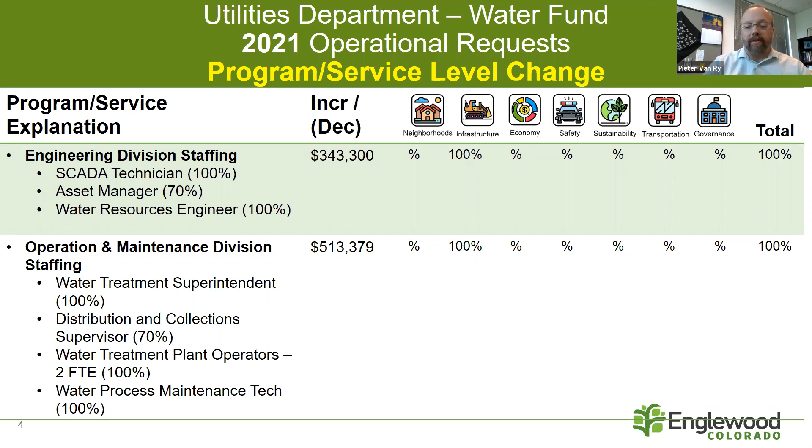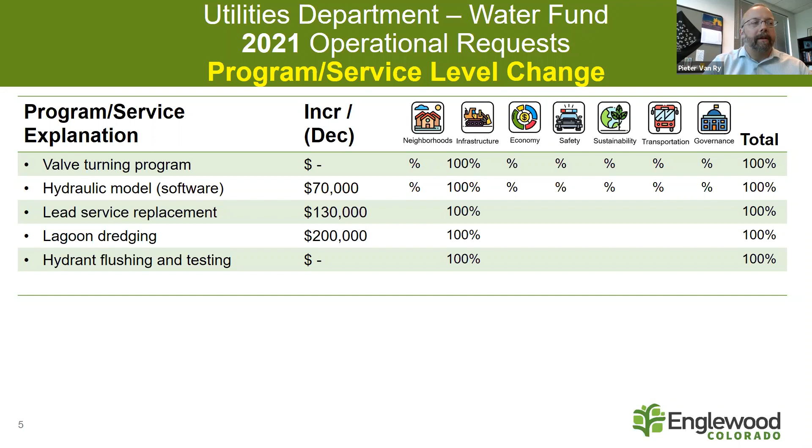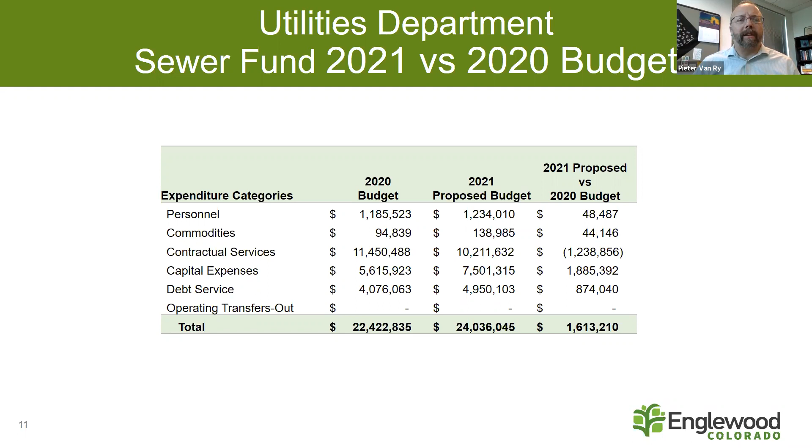Our significant areas are capital expenses, which are predominantly related to South Platte Renew. We also have some debt service. Because of the schedule of projects at South Platte Renew to meet the Regulation 85 treatment requirements from the state, we are planning to issue debt in 2021 to cover that project, as well as some other projects that are in the capital program for South Platte Renew.

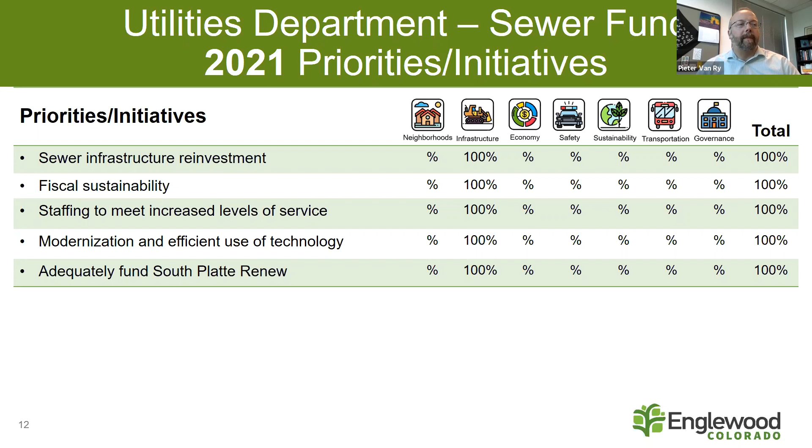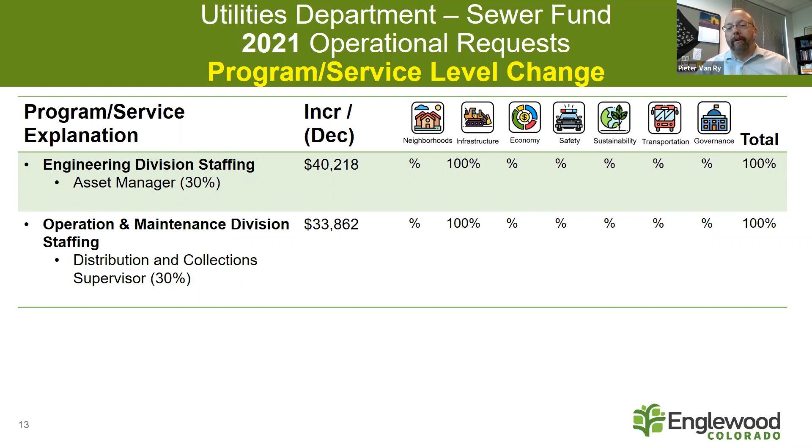The staffing additions for the sewer fund are actually percentages of the staff that I've already covered. So if you recall from the water fund, there were 2 positions that were 70%. These are the two positions that are the other 30%, because they're associated with the sewer fund.

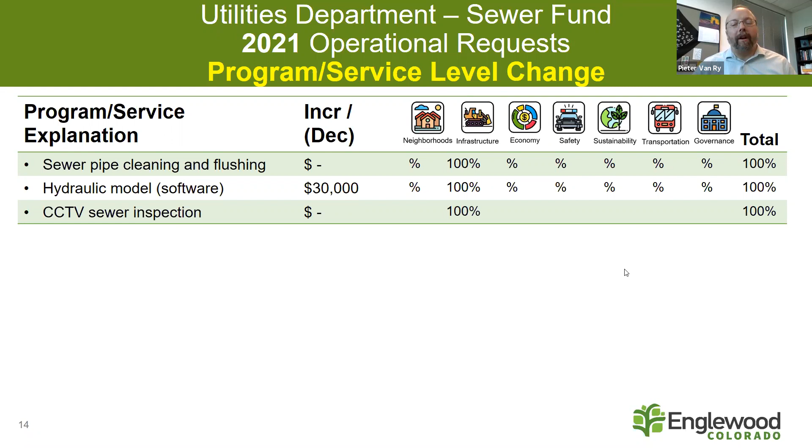So these are the programs that we want to focus on. Cleaning and flushing of our sewer mains is an important project to ensure that we don't have backups. Again, that hydraulic model software helps us understand the system. The CCTV sewer inspection is really our #1 priority, because that'll allow us to quantify the magnitude of the issues relative to the collection system. Our collection system is predominantly clay pipe, and if clay pipe sits undisturbed, it will last for hundreds of years. If it gets disturbed, it's very brittle, it can crack, and then it creates problems. So we want to be able to target the appropriate areas when we do lining projects or replacement projects.

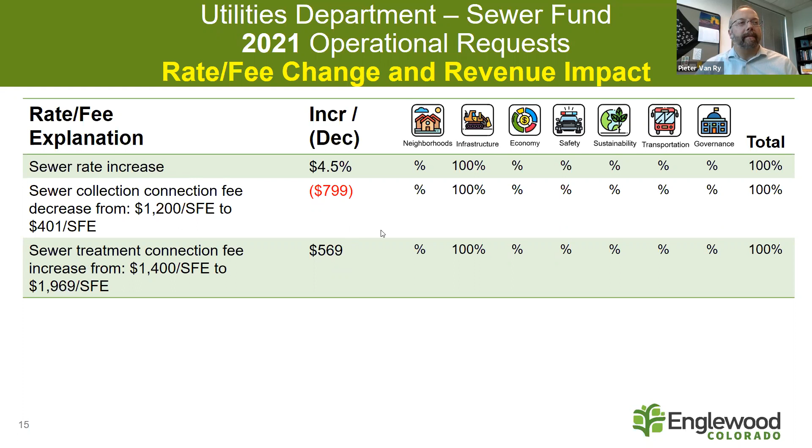Anybody have any questions for Pieter? All right, okay. Do you want to move on to the water main break that Caitlin was referring to over by somewhere near waste management over there? I think it was - was it Caitlin? Yeah, it was off of Union between Santa Fe and Federal. Yes, I believe, thank you. Oh yeah, thank you, Chairman Wiggins and board. We have Deputy Director Goodman, who actually has a small presentation that will go through that break, as well as associated work that we had to do in order to fix that problem. So I will turn it over to Deputy Director Goodman. Deputy Director Goodman, can you hold on one second? I see that Member Martinez's hand is up. Do you have a follow-up question for Director Van Ry? Just a real quick one, if that's okay.

Okay, yes, absolutely. I wonder how much emphasis is placed on keeping certain sewer lines up to date, especially for residents - I don't know if this is necessarily on point - how much we can try to advertise or encourage people to have their own sewer lines updated. I live in an old house with old clay pipes, and every year or so we have to get someone to come in and clear out certain roots and flush out the pipes, as it were.

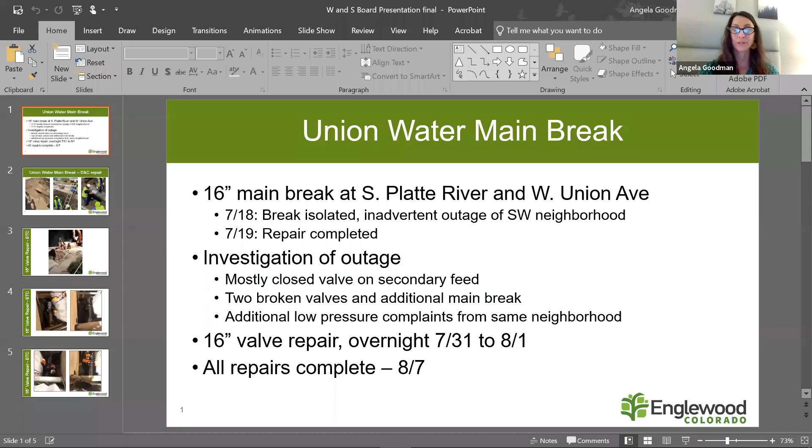All right, so can you all see my screen? We can. Okay, so the water main break in question was a 16-inch main break that occurred on South Platte River and West Union Avenue.

The break actually occurred on Saturday, the 18th of July. Our distribution and collection crews went out and isolated it, which is standard operating procedure for breaks. They inadvertently caused an outage of basically the entire southwest area of Englewood. We started getting a whole ton of calls at the treatment plant and realized right away that we needed to open that valve back up and see if we could get water back to those folks.

I don't know if you guys remember, it was probably about 100 degrees that day and people were using a lot of water, so we couldn't quite figure out exactly why. I'll move into the investigation of the repair a little bit further on.

The very next day, they actually completed the repair on a Sunday. There's Brannan Sand and Gravel, and then Waste Management right there, so they wanted to make sure they were causing the least amount of impact to both the residents and the businesses. There was little to no truck traffic on Sunday, so they completed those repairs then.

The next couple of weeks, we actually spent trying to figure out what exactly happened and why we put all of those residents out of water. We found that the secondary feed, which is a 14-inch water line, had a mostly closed valve. So when we shut off that main feed, we basically accidentally shut off all of the water feed to that neighborhood.

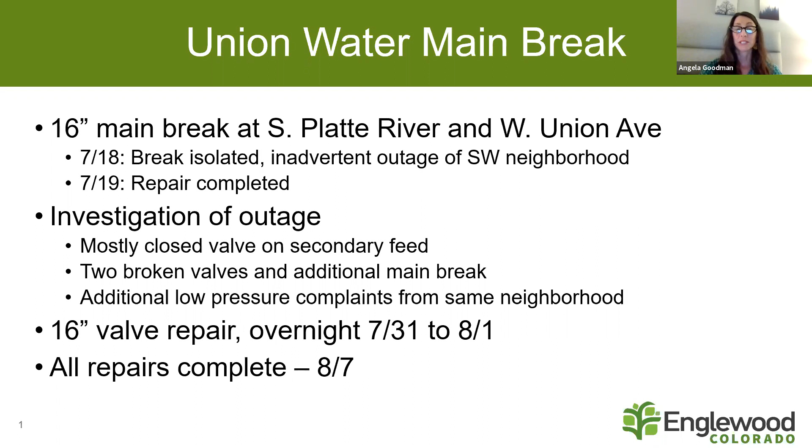Because a picture is worth 1,000 words, I will show you here some pictures of our distribution and collection crews completing that first repair. Can you guys see the cursor on my screen? Okay, so right there and right there are, I think, the two main problem areas for the leak that occurred, and you can kind of see this is the pavement up here.

It wasn't excessively deep. You can see that it's not boxed, and per OSHA regulation we actually sloped it, and the soils were suitable that we didn't need to box it. So you can see the guys down in here fixing it, and then over here you can see them putting on a repair clamp and finishing up the repairs. All things being said and done, that was actually a fairly easy repair. The guys are very used to doing those types of things.

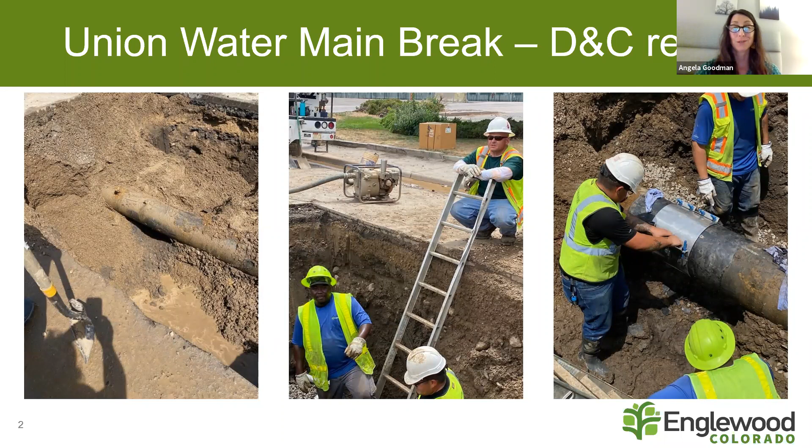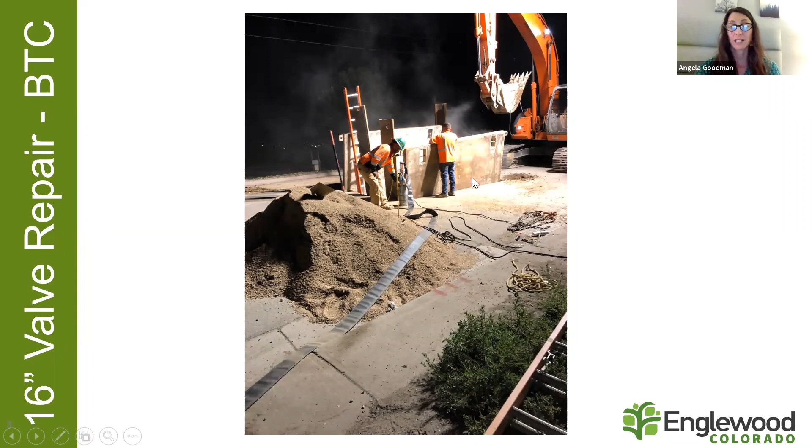The second repair that we did on that 16-inch valve, this is the one that was very deep and complex. You can kind of see that it's dark while they're doing the work. You have the trench boxes that actually stick up above the excavation. I think these pictures are great because it does kind of show how deep the repair actually is. You can see how far down with the ladder, and that's not even really the top.

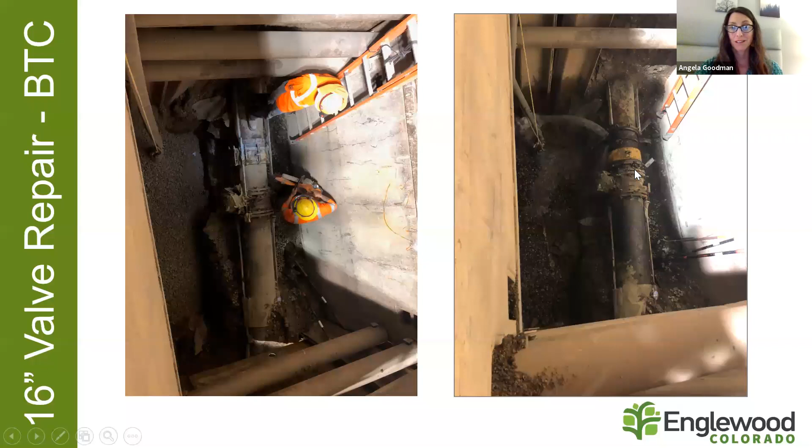So the guys here are completing cutting out the broken valve. You can see some of the water leaking over here as they're cutting that valve out, and then they continue on with the repair. This is that brand new 16-inch butterfly valve, and then they're buttoning it back up over here. It's kind of hard to see, this guy has a flashlight, and over here you can kind of see the overhead light. So it was always interesting doing that kind of work at night.

Those are all the pictures that I have, but just to kind of summarize the lessons learned meeting that we did after that weekend, where we put a lot of people out of service, and I believe the city manager stopped by the site to kind of see what was going on. We figured out a couple things. So one of the problems is that area of town, we abut Denver Water and possibly another municipality where there's lots of different ownerships of water lines in the area.

And so we're trying to figure out if maybe a valve inadvertently got closed by someone thinking they were on their own water line when they were actually on Englewood's. And then we figured out, kind of the hard way because those are the lessons you learn best, that we should probably verify the secondary feed is in fact live and running before we shut down the main feed where a break is located.

So we have a couple good lessons learned moving forward in order to make sure that we don't have such a large outage again. And then as you're fixing things, we found this lots of times, where you find other things that are broken - broken valves, another broken main. So the repairs actually took not quite a month to get everything all finished by the time it was said and done.

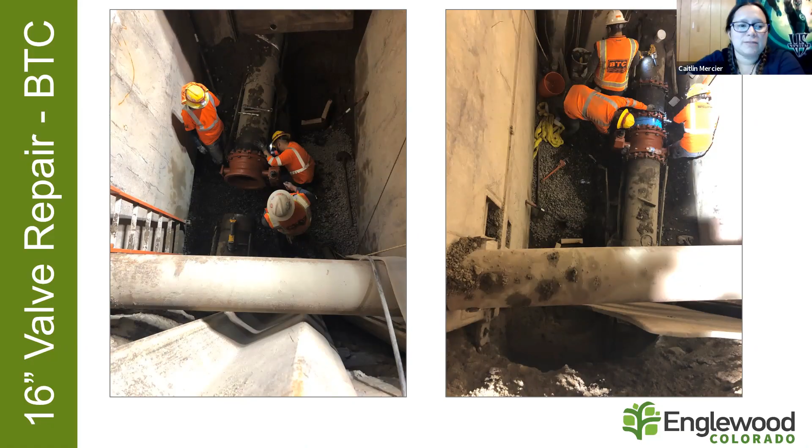You're welcome, Angela. Was that the valve that got inadvertently opened back up? That was the valve that got inadvertently opened back up by a different agency. So that's another thing we have on our list of things to do, is kind of have a meeting with Denver Water to go over who owns what. And one interesting thing that our distribution and collections superintendent actually found was that they make these little inserts you can put into a valve box, and it would say something like City of Englewood or something.

Because I don't know if you've ever seen a valve box or a manhole cover, but they all pretty much just say manhole or valve. So it doesn't really differentiate Denver water versus Englewood water. I think it's happened in the past where people operated things they thought were theirs and it wasn't. So having this extra level of safety where they take the valve box cover off and see an insert that says City of Englewood gives an extra layer of safety for both folks working on water lines and residents, so we don't have these issues.

Yeah, and I would add to that, I think Angela's being somewhat kind. Essentially what happened was a Denver fire truck came up to the valve, and they thought they were closing it, but they actually opened it, and we had our repair crew in the hole with the pipe open. The pipe was cut. They were in the excavation trying to fix the pipe. The fire department saw the leaking valve, thought they'd just shut it, but in actuality they opened it. Fortunately, our guys had just come out of the hole. Otherwise we might have had a much more significant issue on our hands.

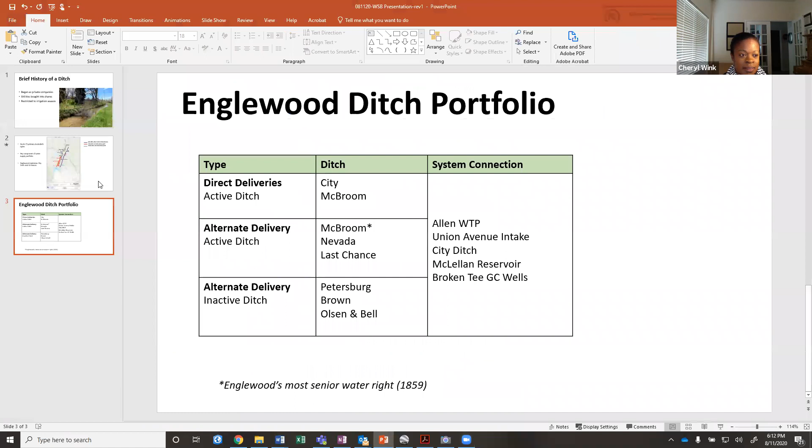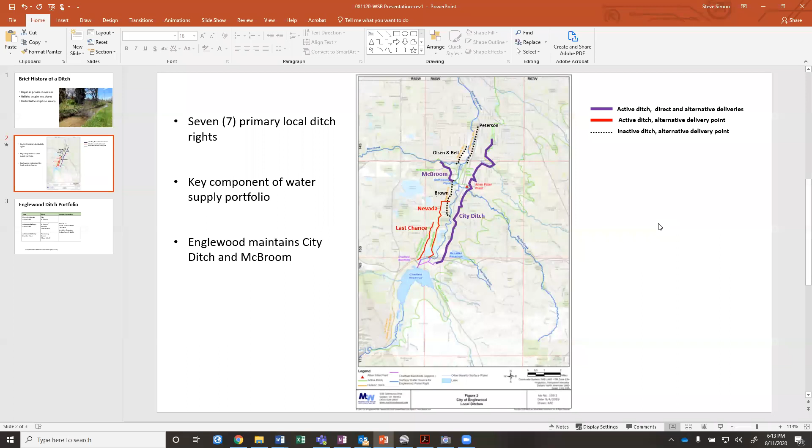Okay, that's me. Let me switch to my other presentation, make sure I have the right one up here. Oh shoot, I just pulled up the wrong one, apologize. Okay, slideshow, okay so I'm going to share my screen again. This is the 3rd update of the work we are doing on rates and fees. We don't have it, Pieter. Yep, I'm about to share it. Oh, here we go, I was talking and sharing at the same time, so maybe I should do one or the other. Can everybody see it now? Yeah, we got it.

Okay, so I would like to again introduce Carol Malesky and Siyuan Rao, who are with Stantec Consultants. They are the ones doing all the work in the background to get us to this point, where we have strong financial models and backup data and analysis for the presentations I've been summarizing over the summer for you, as well as this last one. And so this is the next step in the rate and fee process.

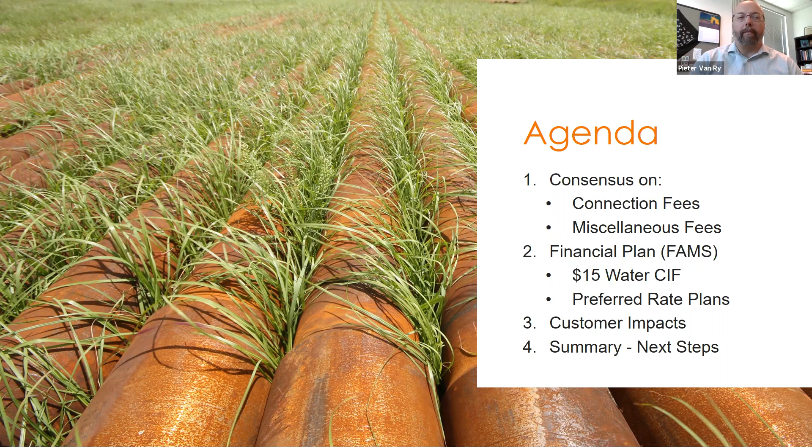So connection fees, we'll go quickly. This is the one-time access fee, essentially. You've seen this slide before. So we are going to propose, like we did last time, to continue to move forward with the RCNLD method, which is replacement cost new less depreciation.

It's a widely accepted methodology, and we think it's appropriate for us. The budget numbers are built off of this, so those previous slides are based on this. You can see what that result is again, and it puts us essentially not at the top, not at the bottom, but somewhere in the lower half of fees.

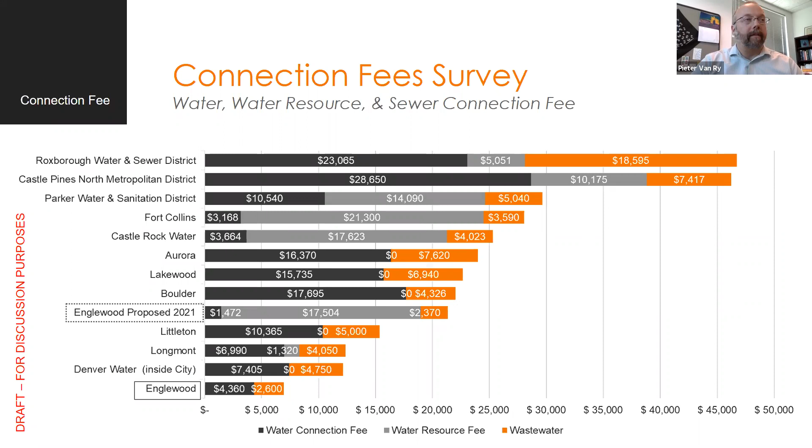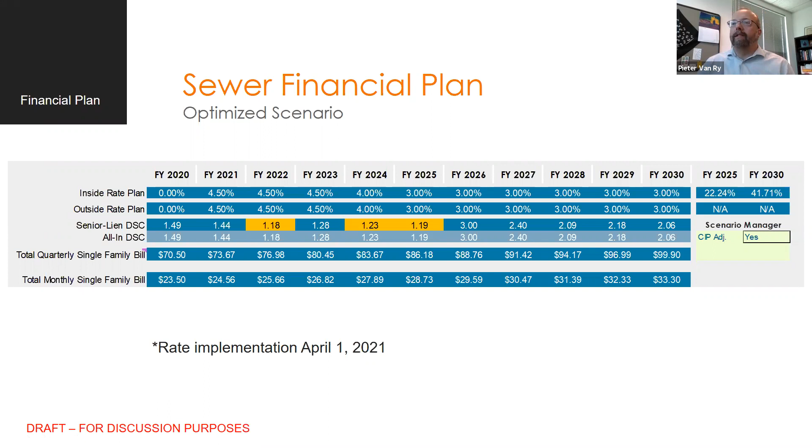Keeping in mind that outside the 2030 window, we do have some more significant capital investments, especially tied to South Platte Renew. So as we move into the next several years, we'll keep that in mind as these larger capital needs move into the 10-year window.

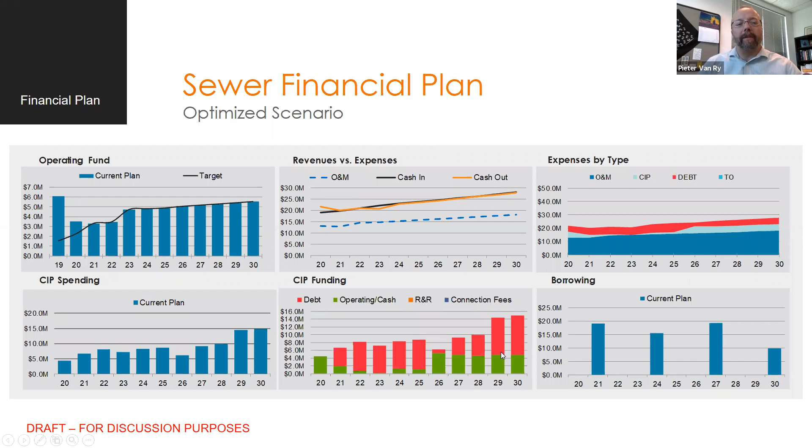This one looks better to me, because you can see this debt number percentage becomes less, and then down in the middle you can see that we're funding a number of our capital projects with a significant portion of operating cash.

So this is the rate survey comparison for those two financial models we put together, resulting in a change of our rates from 46.48 to 63.04. Last month it was 63.45, so it's gone down slightly, 41 cents. I'm sure everyone's very excited about that, but it's a little bit.

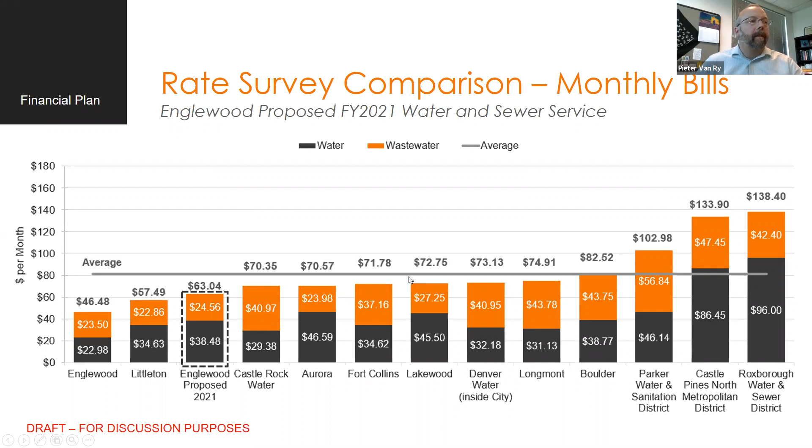But you can see what we're proposing is right next to our neighbor Littleton in terms of being near the bottom, and then average is right around that $80 mark, $75 to $80 mark. Okay, so now we're going to move on. Any questions on that?

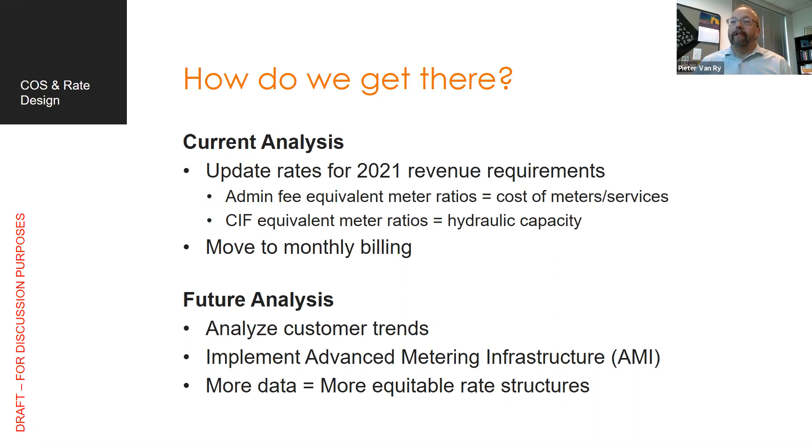So ultimately, the more we get additional data, the more we can refine these structures to make them even more equitable. That's what we will do in the future.

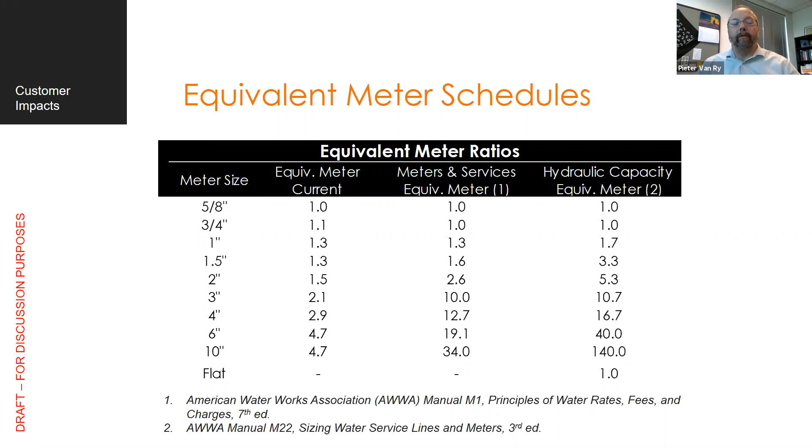So our recommendation is to move to those two ratios.

So what this means from an administrative fee perspective is right now our administrative fee is $8.51 for a 5/8, and you can see how it goes up relative to the current ratio. This is our total of 10,717 customers. Our proposed ratio goes from 1 to 34, and the effect is it will move from 8.51 to 8.85. You'll actually see the 3/4 goes down because we're trying to standardize it, so it's one area where one of the fees actually goes down, and it affects the majority of our customers. Everything else is multiplied by this proposed ratio.

So you can see at a 10-inch, their admin fee will go from $40 a quarter to $300 a quarter. If you again think of the size and magnitude of that meter and that system, you'd expect that a bigger user would have a bigger charge.

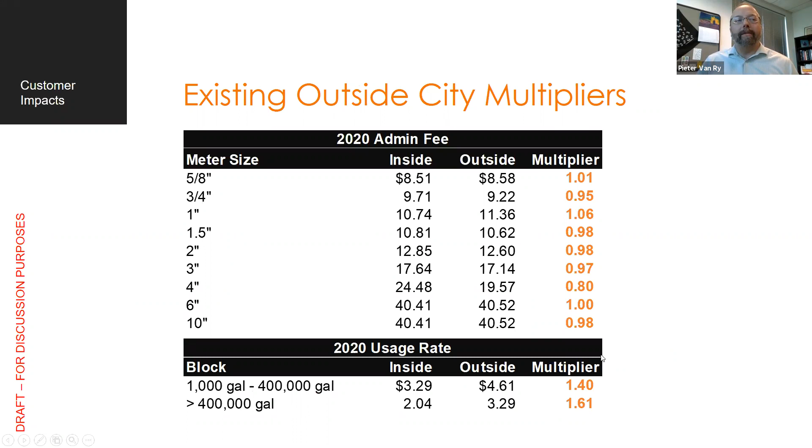So we'd recommend that all these multipliers align with that 1.4.

So what that means from an outside city perspective is you would see these current fees move up when you add the increase, the rate increase, as well as that multiplier. An outside city user would have a monthly or quarterly administrative charge of $12.39, or just over $4 a month.

And so the capital improvement fee is a new fee this year, so we don't have any existing fee to compare to. And so this is where we would use the hydraulic piece, the hydraulic ratio, to calculate that increase in terms of demand on the system and access on the system.

So if you have a 1-inch meter, you have 1.7 times a normal house of access and demand on the system, which means that your proportionate share of the capital investment at $15 would be $25. And you can see what that does as you move up into larger meters. With a 10-inch meter that has the impact of the equivalency of 140 homes, you end up with a monthly charge of $2,100.

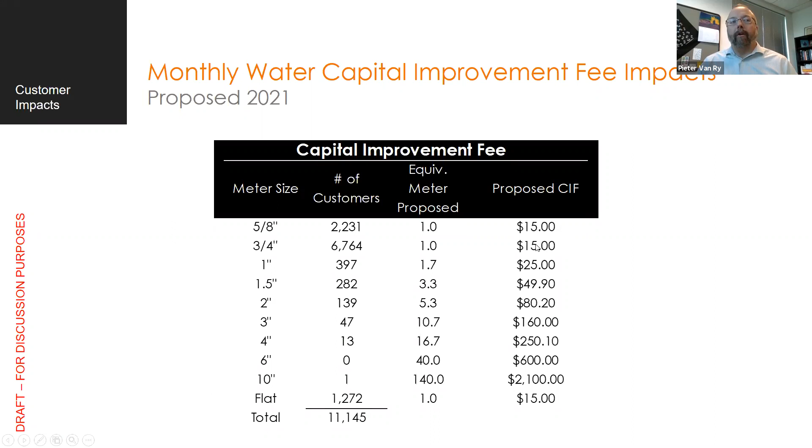And I'm assuming that that's much larger, because that's a much larger entity, that is proportionally the same as if you were a single family home with a 3/4 inch connection. So again, there's a lot of numbers on this.

So when you look at the quarterly water bill in terms of its effect, you can see the inside city versus outside city effect from a usage existing is 329 for 1 to 400,000 gallons. And then as you get over 400,000, it's 204. It's the same for 3/4. So as we put the 4% increase on, it goes to 342, 212 for both of these. We now have a CIF, which is $45. Again, this is quarterly. And then we have an administrative charge that moves to $8.85 from a few slides ago.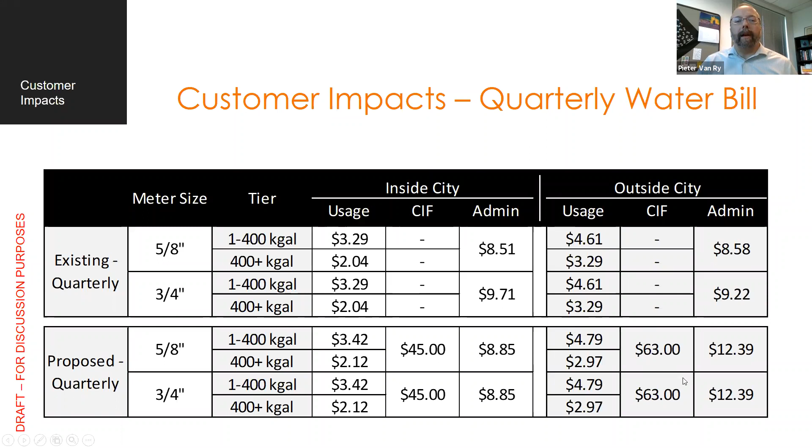Outside the city, this has that 1.4 factor. So you can see what that does to those rates as it relates to an outside city customer.

This is where you have the capital investment fee, and you can see that higher capital investment fee for an outside city customer.

So on the sewer bill side, this is just a straight increase of 4.5%, so we keep our rate structure the way it is. You can see there's a treatment component at $3.25, a collection component of 43 cents for inside the city, and then we have a minimum charge. Oftentimes a user defaults to the minimum charge, which is $70.50. From an outside perspective, it's a little bit less because they don't use our collection system. They're only using the treatment component.

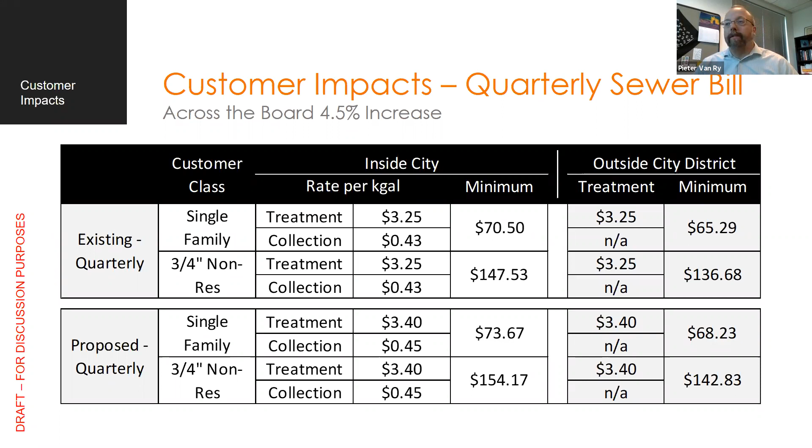Now you may ask, why are these two numbers the same when we just talked about the 1.4 for outside city? That's because these are set in the actual agreements, and in the agreement there's a provision. Some of the agreements have a provision for 1.05% in terms of an increase charge per customer. So this might be something that, as we look at those agreements into the future, we understand there is rationale for why you charge a multiplier to cover the risk assumed by the owners of the entity. In this case, the owners of the entity are Littleton and Englewood, and the entity is South Platte Renew, which is a $500 million wastewater facility that those two cities are ultimately the responsible owners of the risk for. So it might be something we look at as we continue to examine those connector agreements and find a way to align those.

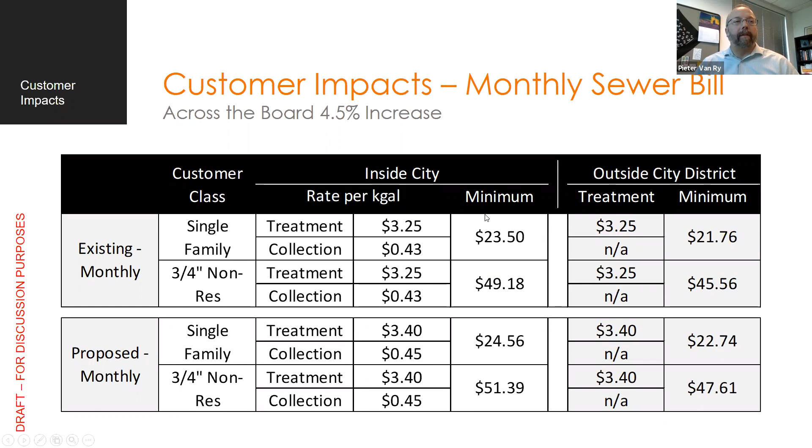And so this is what the increase looks like on a monthly perspective. You can see it's basically the previous slide divided into monthly figures. And then here's where we get to that number that's been in the chart we've been showing for several months, with the admin fee on this monthly bill.

So the admin fee is $2.95 for water. The sewer is $24.56. The usage fee for water, assuming 6,000 gallons of usage, is $20.53. The capital investment fee is $15. So the water total is $38.48, and the sewer total is $24.56, for a total bill of $63.04.

You can see just below what the bill is today, and that's where the increase is. The increase is largely on the water side, to start building up revenues so we can attack the projects we need.

You can see the same thing here from an outside-city perspective. This is what their bill would look like, including that 1.4 multiplier, which ultimately goes from $52 a month to $76 a month.

So that was a lot of information. I can pause here. I only have a few more slides, and then I can open it up for general questions, then we'll come back to any of these slides if you want.

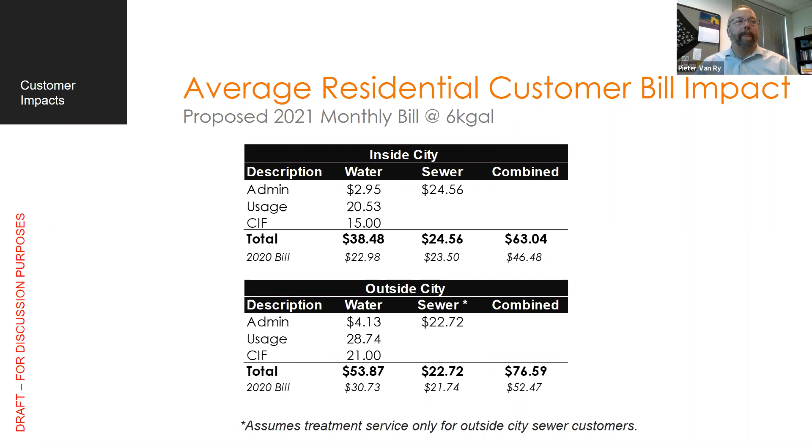So there have been some questions about delinquencies and accounts. Since COVID and since March, this is definitely a concern as it relates to addressing the funding of the water system and its relation to the charges charged by our neighbors, while at the same time we have COVID and an economic downturn—whatever the technical term is, we have economic troubles right now. So we wanted to look at the average delinquency in accounts.